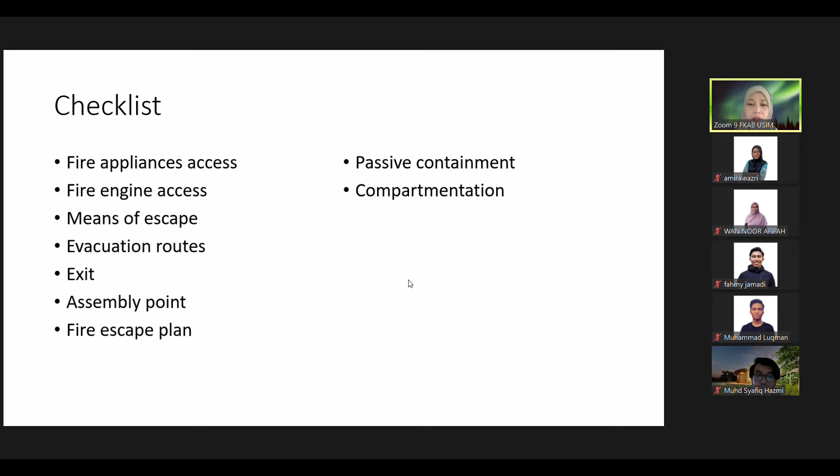Schedule 5, and what happened to your maximum travel distance, how you determine that, and evacuation routes, meaning that how is the circulation, how is the door swing, we need to identify that. Assembly point, the fire escape plan. Fire escape plan is actually how you do the route, the circulation for the fire, meaning that there is no obstruction.

Okay, how are you going to determine the fire hydrant? And I want to ask you whether this building has a wet riser system. Is there any elevator? Is there any lift? So this is not type of air. Okay, I think we are having slightly the typo, the checklist, the checklist.

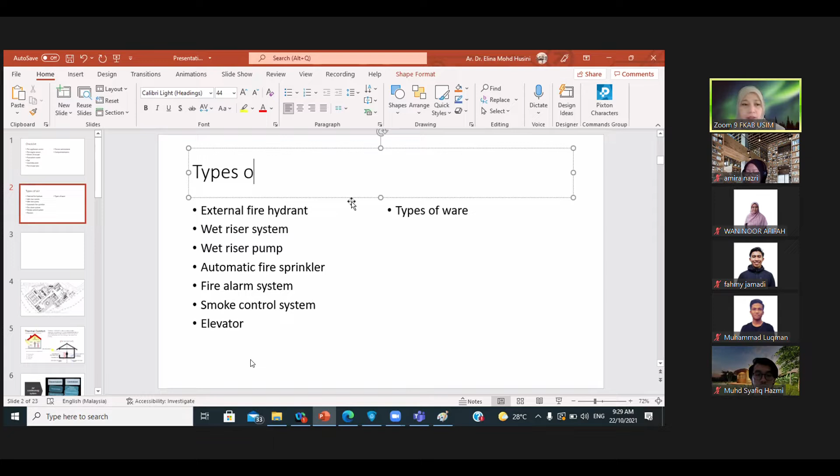And also we are going to ask you what kind of aircon. Okay, so be prepared, I think I would call here.

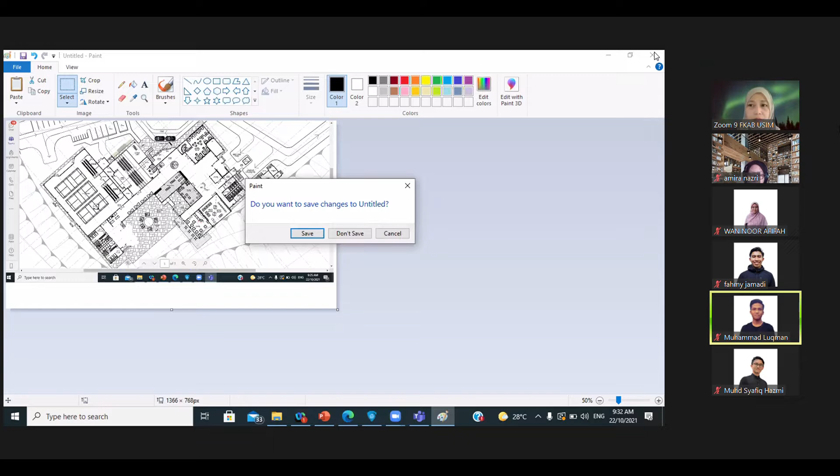It's okay, we are just sharing the knowledge here. Okay, is everybody seeing this? Not yet. Yes, yes, I made my picture smaller too. Okay.

So I'm saying that this is actually the plan. Can you just snap here? Or I'm calling one of you three, maybe start with Afifa first because she's dealing with the fire accessibility.

How are you going to calculate the fire accessibility? This area is about 4,000 meter square. I'm just giving you the information. The building itself is about 2,900 meters square. Most of the building here, the height is about 3.7 meters high.

Okay, and the information for width and length. Okay, width. So this is just roughly. Width from here to here. Okay, this will take about 50 meters, more or less.

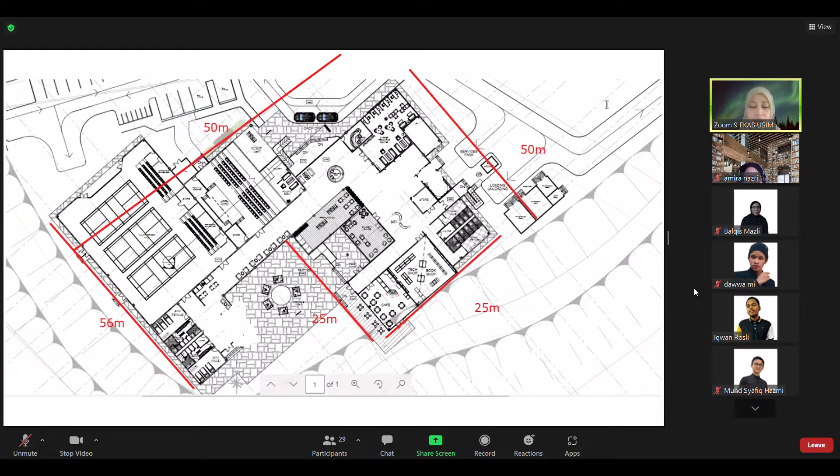How is your site analysis going? Is it going well? Site analysis for your current project, Iqwan? Iqwan, yes, now you are entering the final project? Yes madam. Site analysis already done? Yes, already submitted, already submitted.

So of course, how about the group for legal and also for services? They also done well. Okay, so they know how to search. Yes, the nearest point for water discharge, water connection. Okay.

Yes, okay, okay, what else? What else do you need to determine, Iqwan? Maybe the electrical, madam. What is it? Sources of, what's it called... electrical supply. Electrical supply, okay.

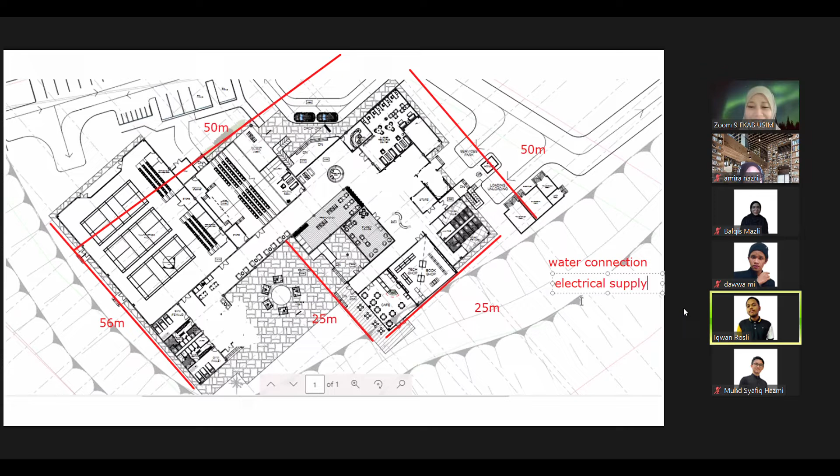Electrical supply, you need to search what is surrounding there. So what are there? What are those? You need to know what? To know electrical supply, you need to know the surrounding. You do the site analysis but don't know how to do the site analysis.

Who are the grouping inside your services? Who is it? Iqwan isn't in that group. Not, madam, but even if not, this is the project you are going to do individually. Of course you need to know this, Iqwan. Okay madam, if not, how?

Okay, who else? What else? More? Wastewater. What else?

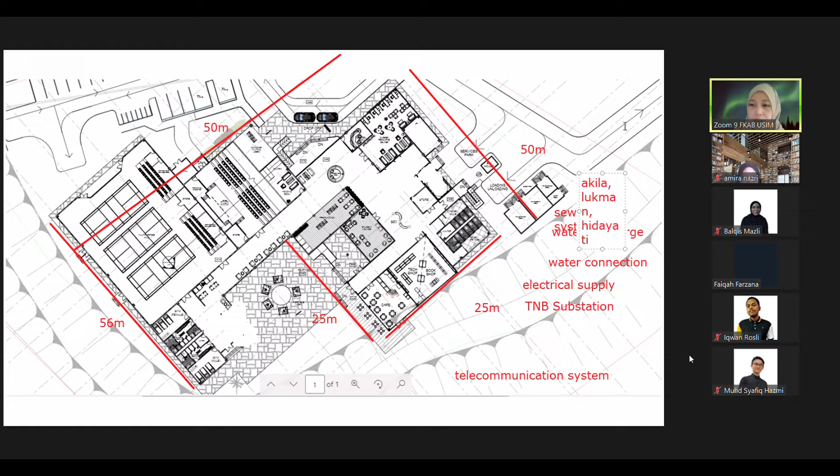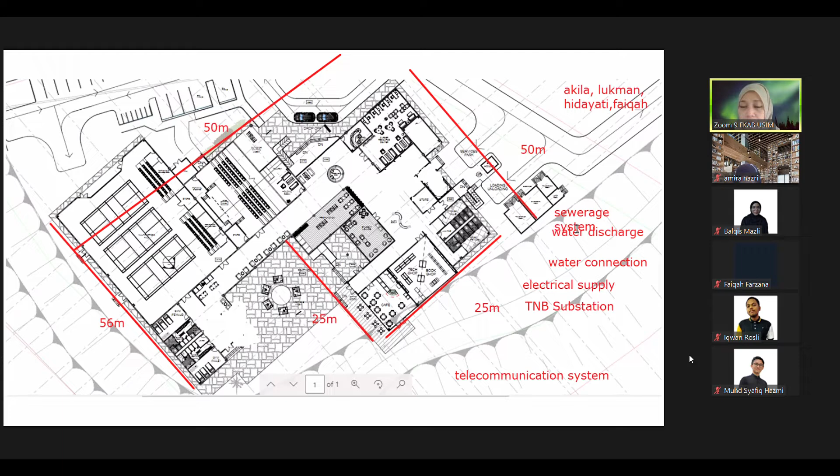So I must say that Akila, Luqman, Hidayati, Faiqah will advise us because you are really expert in this matter. You already have done some of the discussion and also in-depth study on the sewerage system, water discharge, water connection, electrical supply and fire appliances.

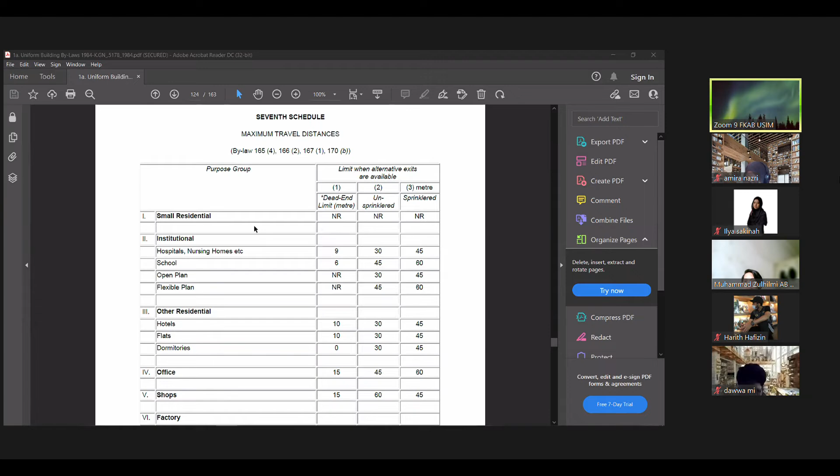Okay, please tell me what you can find from this. So this is the 7th schedule. So our type of building is the place of assembly, this one. So the minimum distance together is 45 meter, and the maximum elevation is 61 meter.

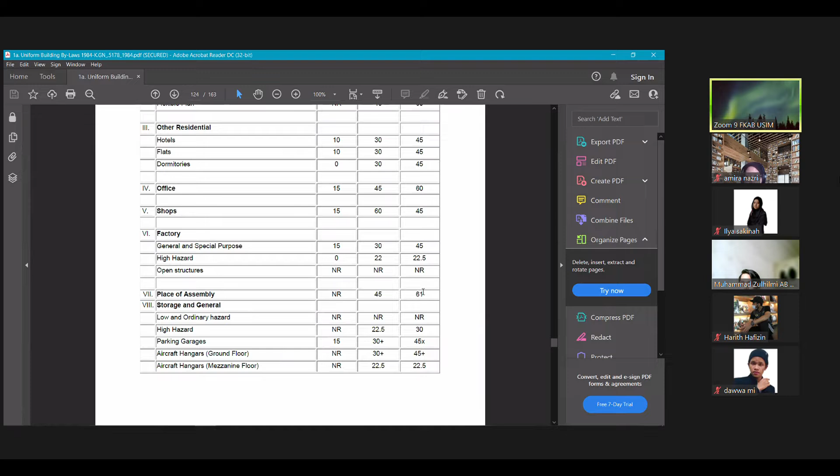Is it correct? No. You read back the title there. Read back the title. Sikit title there. Okay, the 7th schedule, the maximum travel distance. Okay, maximum travel distance.

So the first group is, nanti, place. Limit when alternative exits are available, I want you to read. Okay, limit when alternative exits are available. Maknanya unsprinkled system. The building is unsprinkled system, no sprinkler. So the maximum, this is maximum, not minimum. The maximum, it can be lesser than this one.

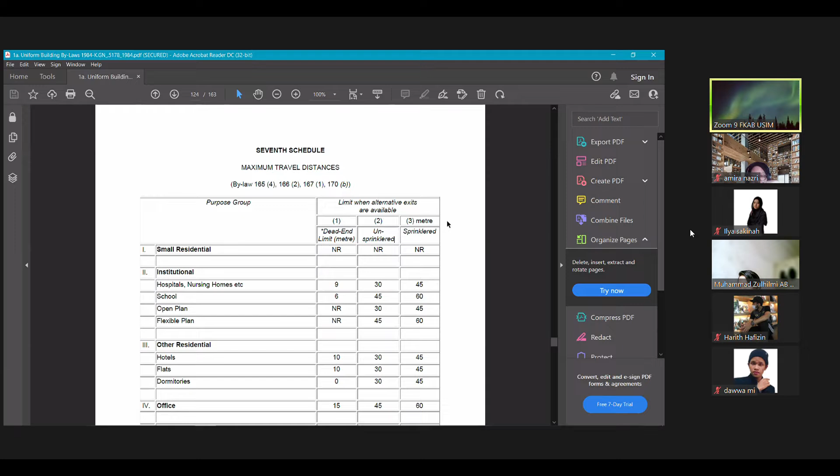This is the maximum travel distance, tengok tadi, nombor 7 tadi, part 7. Go down to part 7. This is the column for unsprinkled. Okay, 45 meters from door of the fire staircase to another door fire staircase. Maximum is 45 meters. It can be 30 meters, it can be 40 meters, but the maximum cannot exceed 45 meters. If 48 meters, you still need another staircase, or you have to change the design, so make it nearer, your fire staircase door to another fire staircase door.

So the third column, 61 meters, meaning, what is the meaning of 61 meters here, Zul? Okay, go back to, apa, okay, ada, kenapa ni? It is with column, the sprinkled. Yes, sprinkled.

Okay, Zul, do you know what sprinkler and non-sprinkler means? If there is no sprinkler...

What is the image for sprinkler? What is the location of the sprinkler? Ceiling. Okay, so you know.

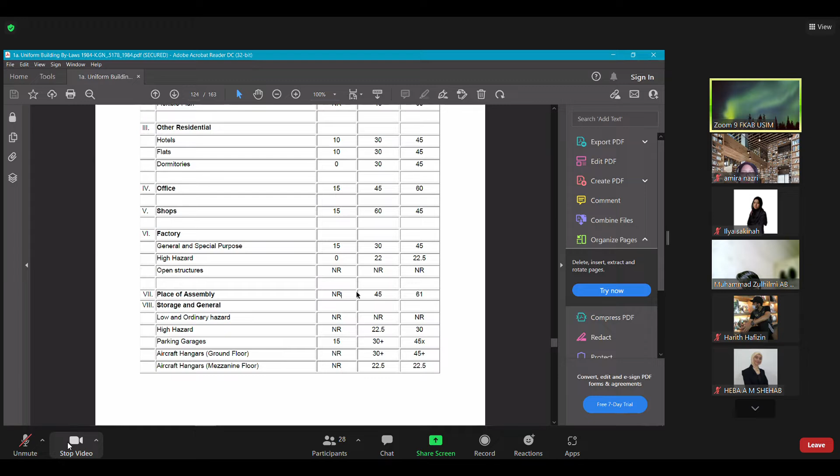Okay, so do you understand now, Zul? Okay, I understand now. Before this I didn't really understand.

Okay, I'm sharing screen again. So...

Zul, where do you want to determine the fire staircase here? Where do I determine the fire staircase? Around the service area.

Okay, you try to sketch. Go to annotate. There's a code you annotate up there. Okay, try to design anywhere. Put it somewhere first, then explain why. The building is already there, you just need to fill in. Anywhere, don't follow this existing design - it can be anywhere as long as you have the reason.

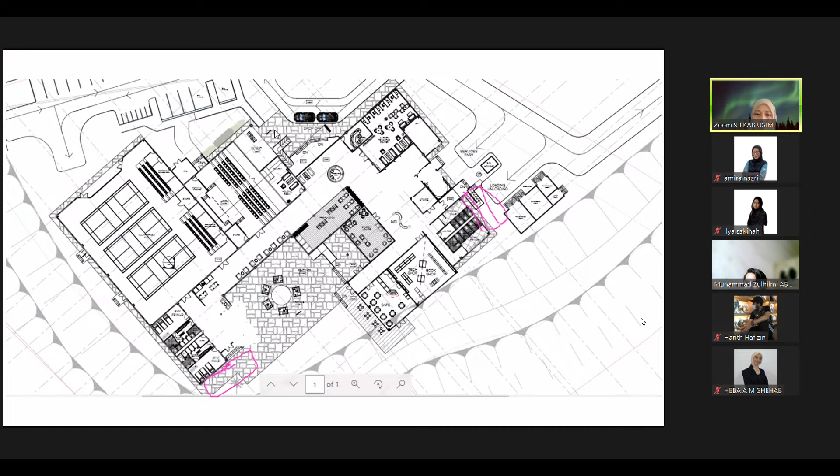with sprinkler - this building has a sprinkler in it. So what makes you determine the first staircase is here? This is your first staircase here, and your second staircase is here. What is the reason? Because since the building has the sprinkler, so the max travel distance is 61 meters.

Okay, so how do you calculate the 61 meters? From the door of the... No, no, it has to be perimeter zone. Perimeter - what is the perimeter? I'm just saying you need to calculate from here to here. Okay, back, wait, in the back here.

Can I just say that you calculate directly like this, 61 meters? Okay, how are you going to calculate? Can somebody help quickly? How do you calculate?

I cannot hear you because of the break. Okay Heba, how do you want to help Zul? It's actually determine the first staircase is here and the second staircase is here. What makes him decide to determine the fire staircase is here? How can he calculate that this is the maximum 61 meters? What is the procedure, how does he calculate?

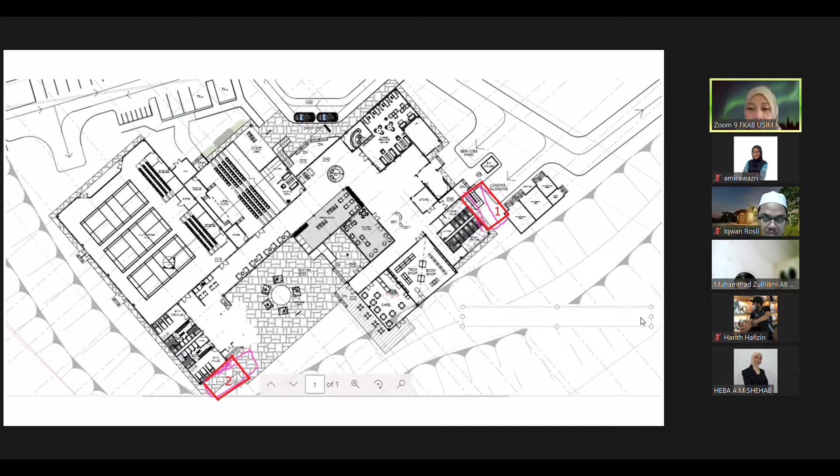Need to calculate the perimeter from the pathway, like the exits, until you reach the other staircase. Okay, then - not just answer a straight line, based on perimeter. Okay, perimeter meaning you calculate this - you cannot simply say like this, or just simply cross the building like this. You have to calculate based on perimeter.

The 61 is this one to go outside. But let's say you have to measure from here to here to here and coming back to here - is it 61 meters? If this is exceeding, you have to change the location of staircase number 2 or staircase number 1 so that the distance from staircase 1 to staircase 2 along the perimeter is 61 meters.

Now do you understand, Zul? Faham tak? Yes, I get it. If this is actually more than, let's say when I calculate - okay this is about 20, just now it's 25 meters. 25 meters, let's say this is already 25 meters.

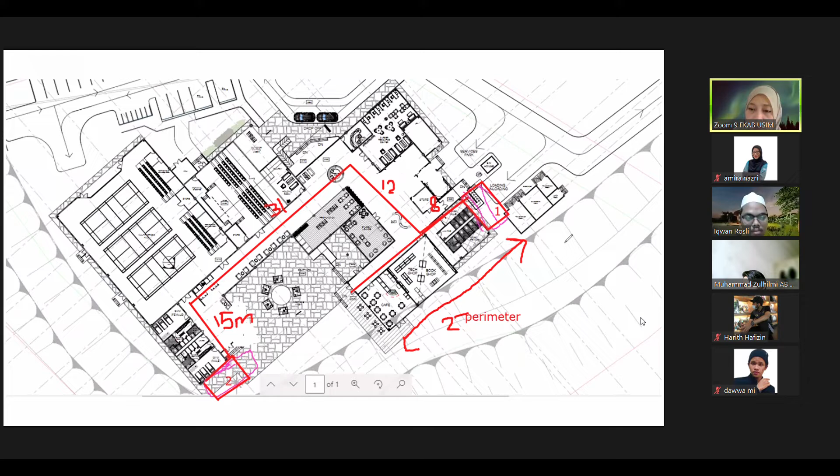It's about 51. You calculate, is it more than 61? 15 add 31 add 12 add 8. Berapa dia punya perimeter? Total? 66. 66. So meaning that

This is already exceed, betul tak? Exceed the fire staircase location. So you need to redesign back to make it nearer, Zul. So mana Zul? Exceed. So you cannot put it here, you need to find another location. You adjust the location, need to make it nearer.

Maybe your staircase shall be here. Oh, jap. Your staircase mungkin dekat sini. Staircase number 1 or number 2, it shall be nearer. You kena dekat sikit. Any suggestions? Nak dekatkan could be, sikit. Yes, maybe could be here.

Okay, but you need to remember this is a public area. See, people got kiosk here. You don't simply put your fire staircase as an obstruction for people to move to the other place. Okay, so let's say you have to design the place, maybe here Zul. Okay, maybe here. This is the fire staircase.

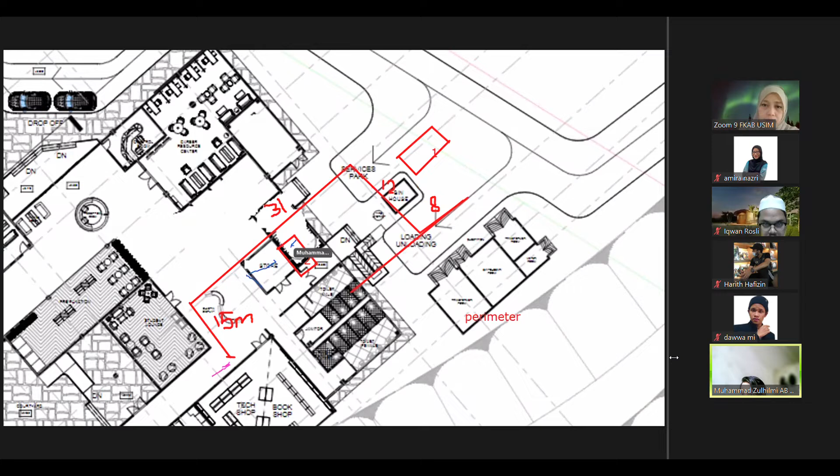This is ground floor plan. This is ground floor plan. Heba wants to help Zul. Zul, this is ground floor plan. If this is ground floor plan, okay. Let's say this is the fire staircase.

Okay, apa Heba? How you want to determine the fire door, the swing of the fire door? You know what is swing of the fire door? This is the swing. This is the fire door. This is the frame of the fire door. So this is the swing. How is the swing of the fire door? No idea, Heba?

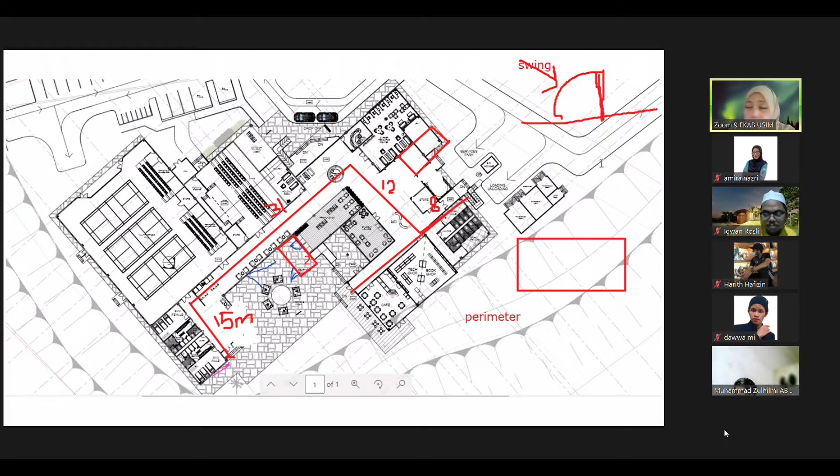Heba? Heba? Okay, this is not good when I'm calling you. If you cannot hear or your handphone has a problem, you have to text me. You have a problem? I'm checking my WhatsApp. No problem, everybody has no problem.

Everybody can hear me. Okay, Zul, macam ni. Kalau misalnya at ground floor level, dia punya pintu dekat sini kena keluar, Zul. Keluar. Okay, pintu yang kat sini kena keluar. Macam tu. Okay, ground floor plan. This is ground floor plan. Ni yang madam takut because madam dah ajar lama dah ni. Alright, Luqman. Clear Zul? Clear Zul. Okay, Madam.

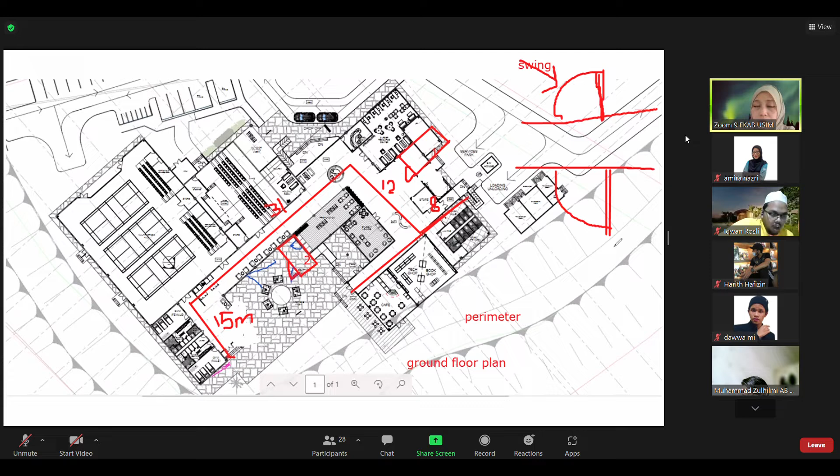Alright, so Zul kena tengok kalau if upper floor, the fire staircase, the door of the fire staircase akan jadi dari dalam macam ni. Dari dalam, ke dalam. So ground floor dia daripada sini dia keluar. Kalau daripada upper floor, so dia punya fire door kena macam ni, ke dalam. Okay. Second floor to this one, if this is a staircase, there is a radius.

Your swing of the fire door cannot be like this. This is not good, wrong. The fire door shall be out from the radius. You need to understand what is the landing of the fire staircase. You cannot exceed the radius. This is R, radius. So the swing of the fire door cannot enter the radius area.

Dia kena keluar, Zul. Jangan buat, do not do the fire staircase like this. You are encroaching the radius. Cannot. No, this is right.

Heba, are you understand? How do you do the fire staircase? This is for upper floor. But for ground floor plan, Harith, the ground floor plan dia kena macam ni, okay? Pintunya keluar. Okay, faham ya?

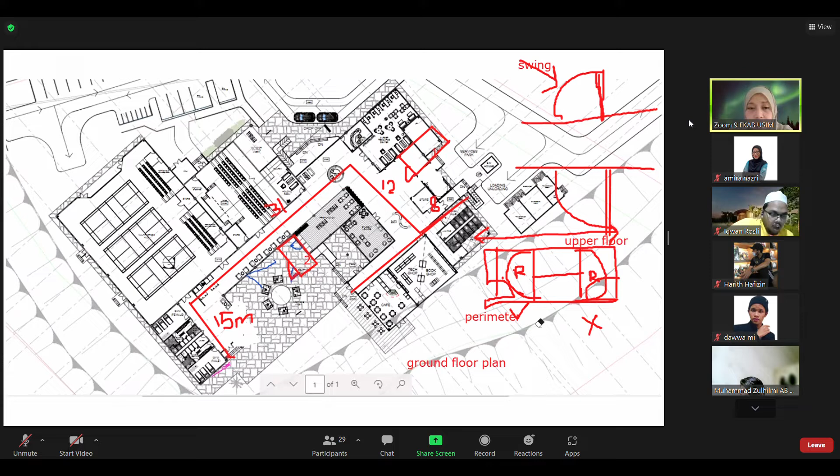Last week when I asked you, you said everything fine, madam. I am asking you, so faham ya? Faham ya cara nak buat pintu staircase?

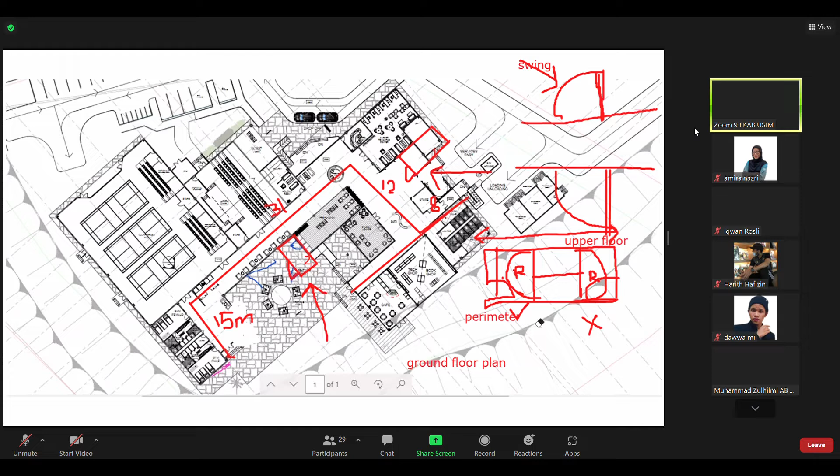Saya rasa centralized aircon system itu. Okay, centralize which area? You ni annotate, cepat annotate. Color sikit. Which area you want to centralize? You to use centralized aircon. Nampak ke madam? Yang warna kuning tu. Alright, okay, why?

Pasal satu lagi dekat yang sini. That area, is there any split unit that you want to use? Tak ada. Macam mana madam? Sekali lagi kurang jelas tadi. You are proposing only centralized aircon. How about this area? How about this area? This area?

This area? This one is centralized. Okay. Yang the blue one, what do you want to use? Yang sini split air conditioning system aja.

Okay, split. If you are using centralized aircon, what do you need to have to provide the space for mechanical? What you need to have?

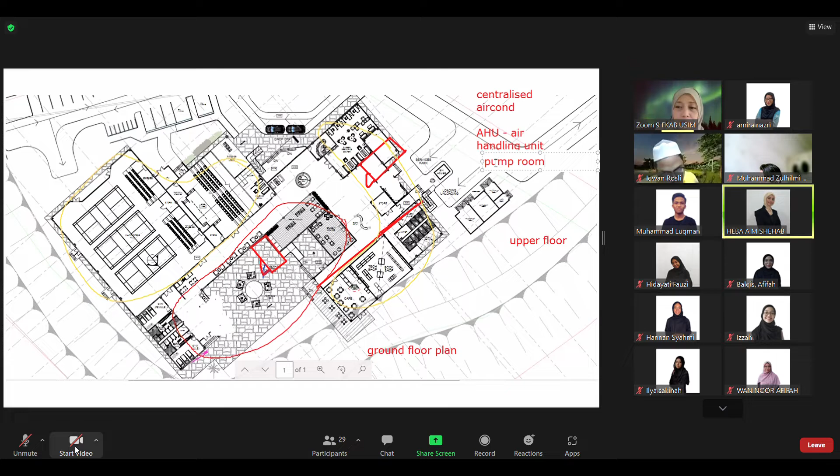You need to have pump room. If not, the system cannot generate. Yeah, you need to have pump room. Inside pump room, there is a chiller to cool. You need to know the system, how the centralized aircon being function.

Madam, pump room dengan mechanical room tu sama ke? Yes, some of us we just put, okay, because you are at the second year, mechanical room, but you need to specify pump room. Mechanical is the system inside there. I will show you the photo, the image. Okay, so kalau nak decide centralized aircon, you need to have AHU, you need to have pump room. Okay, now understand so far, okay?

So for this plan, the AHU, I think they put somewhere. Yeah, I think they put somewhere here. Wait, AHU warna apa? Warna kuning. They put somewhere here. This is the AHU. Because the AHU, the ducting, they will go like this.

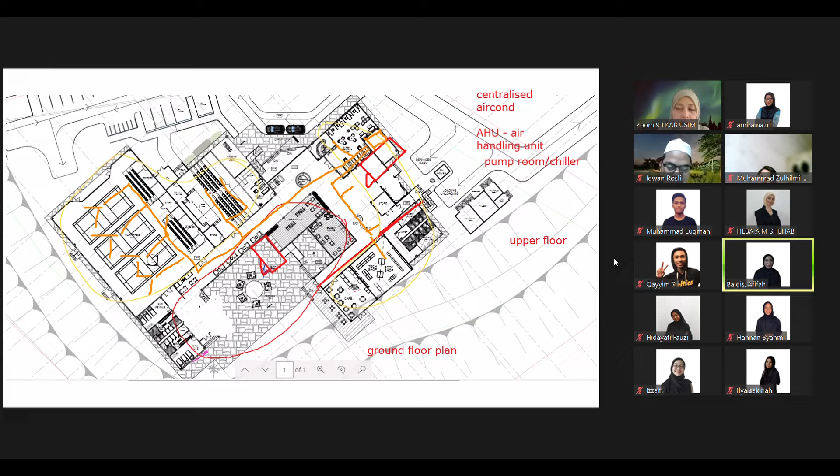Afifah, you want to share something about the bomba (fire department) calculation? You already calculated the volume, right? So your sketch, is it enough? Estimated 9,805, meaning it's more. Note that down there, 9,000 something. In here you can annotate, pick annotate.

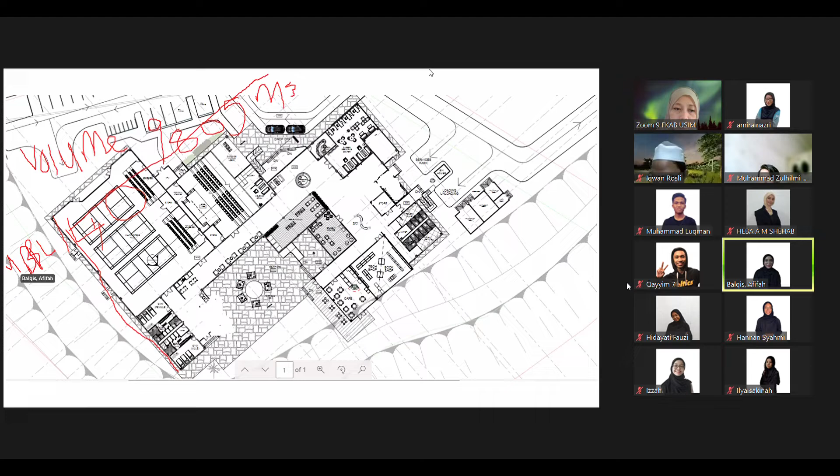Volume. The volume is... nine, sorry, zero, five. Okay, so according to bylaw 140, what is the decision? The decision is we use 1/6, okay, of the perimeter, 1/6 of the perimeter.

So meaning if 1/6, I haven't checked the chart. Can you share with me what is the chart? Chart, yes. Oh, is that okay, let me stop sharing. You share the volume equivalent quarter, half, yes. Lots of Korean, lots of Korean pictures there. Madam, can you see this? Yes.

This, okay, 1/6 of the perimeter for fire engine access, okay. You stop there, you stop there. So I want everybody to understand, Afifah already calculated the volume. Length times width times height. What is the volume? Width times length times height, you get the volume.

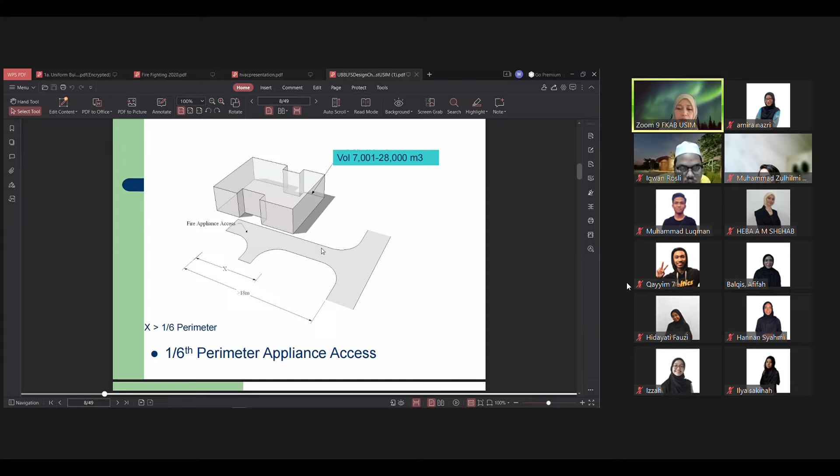All right, okay, everybody understand? After I test one by one, then I know some of you still don't understand how you want to get that. Because later you won't be able to do the design.

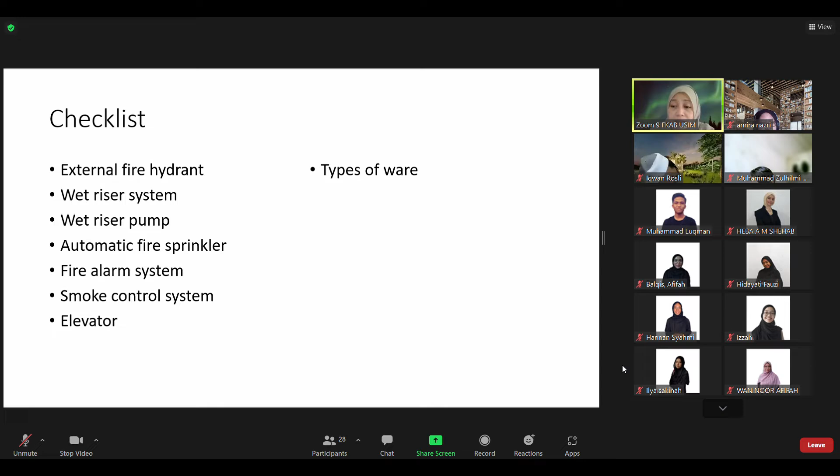Okay, please revise back the wet riser system, dry riser system, why you need to choose wet or dry. Elevator, how to do it? Do you need an elevator, do you need a lift? How do you draw the lift? Next week I will ask people to draw a lift too. Okay, settled.

And continue with our lecture on thermal comfort. So we need to understand how the system, air conditioning system, works, because we need to understand the physics about thermal comfort. Thermal comfort is the outcome of a well-balanced combination of building systems adapted to both the location of the building as well as the type of activity performed. Okay, let's say the activity inside the studio.

We have a lot of movement, people measuring, people getting from one place to another to discuss. So maybe you need the arrangement and the measured reading for the aircon slightly different. You have to control the system. Let's say 24, you are using now 22 degrees, for you it's quite cold, and also the load occupancy, how many people inside the room, quite many of you. Let's say for first year, already 50 of them inside one studio, so we need more, lots of aircon.

So this is actually to understand the keywords here, if you are using thermal comfort, and why you need the aircon system. What is evaporation? What is heat gain? Sorry, not heat gain, okay wait, let me correct, heat gain, heat loss, and radiation.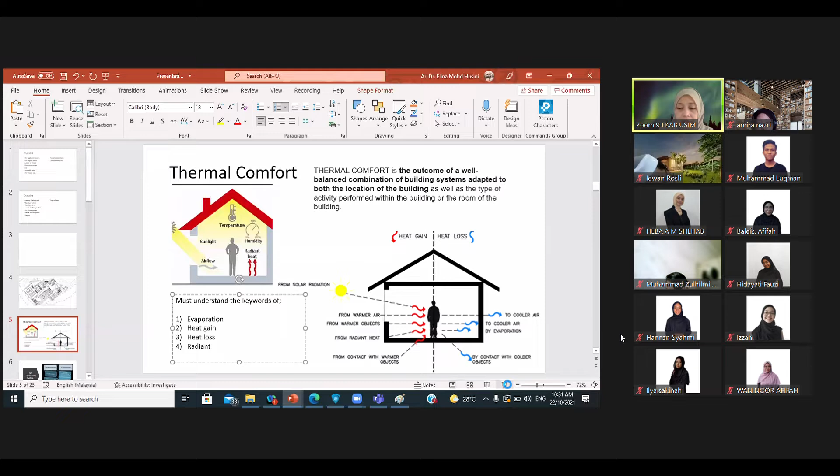You need to get the definition. During the exam I will ask this, what is evaporation? Yeah, what is heat gain? What is heat loss? Please sketch the radiance.

So bear in mind, in my class, oh no, now it's 28, just now it was 30, so one of the students is not here. So I'm afraid that those who are not consistently inside my lecture, they cannot answer the question. My questions, a lot of it would be sketching and also drawing with description. I'm afraid that you cannot draw. Okay, you have to understand what thermal comfort is.

Okay, so air conditioning systems, there are two: centralized and decentralized. For decentralized, we use the split unit system, meaning it is controlled by its own compressor. Compared to centralized, there are terminal elements because they must gather the sources and the mechanical equipment at one area, the cooling area or pump room, to distribute the system. Then you need ducting. If decentralized, single package split unit, you don't need ducting.

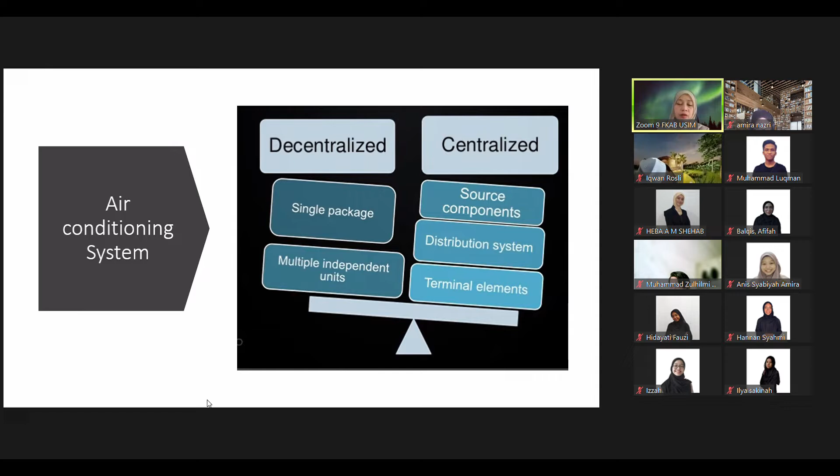I will ask students. So you need to know which air conditioning system to provide for the building - centralized or decentralized? If you choose centralized, you need to provide an AHU room. You need to allocate the area, provide in the ground floor plan space for AHU, air handling units. And also you need to have the pump room. Without the pump, how will the chiller cool? The system needs it to operate and cool the area.

Okay, decentralized I mean normally in mid-rise buildings, because this is only a small area. That is why office buildings for bosses sometimes use the split unit, because not every day, not everybody has activity inside the room. Most of the time, for open area offices, they use centralized because everybody works on time from 8 to 5, so the position, the location, the seating would be at the same area, the same place.

Normally for high-rise buildings, with consistent usage time, that is why we use centralized - meaning 8 to 5, 8 to 5. If the space is not consistently being used, let's say it's only used maybe today 11 to 12, tomorrow 3 to 4 o'clock, then they may use a split unit system or package system.

Okay, I will ask what's the difference between centralized and decentralized. Don't understand? You need to ask now. What is the advantage and disadvantage?

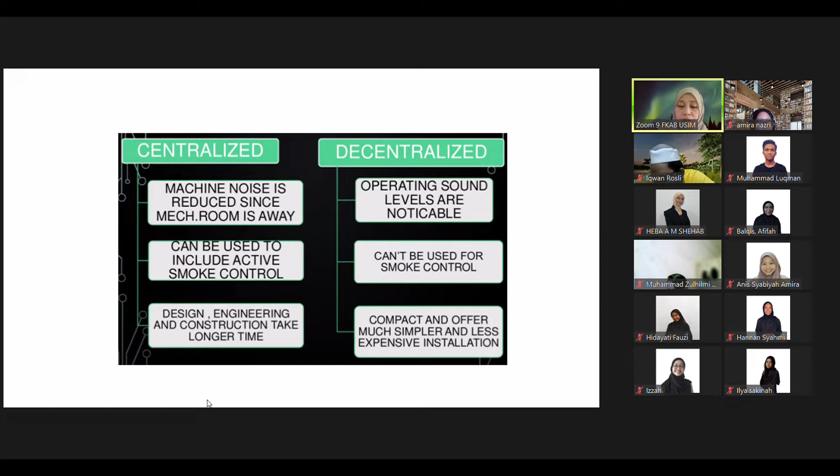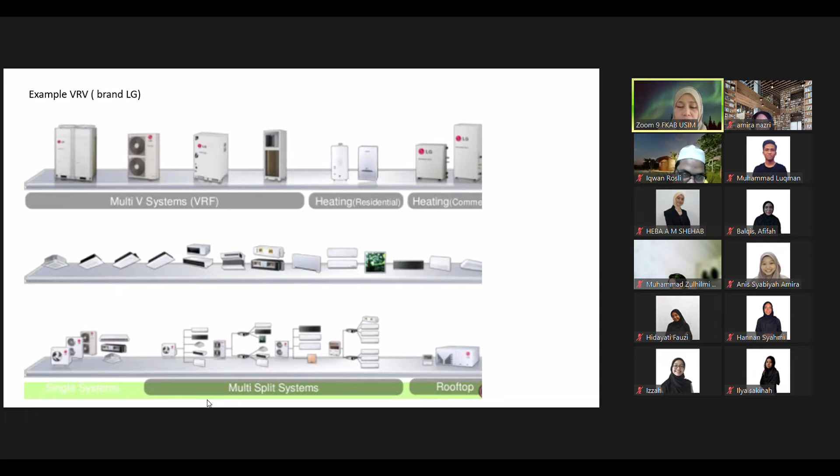Okay, what is a chiller? The chiller is in the pump room, sometimes at the cooling tower on top. We call it a tower because the location is on top of the building, the rooftop of the building. So the chiller is actually to provide a comprehensive air condition solution.

Okay, this is the brand, one example brand is LG. This is how I want to tell you that a chiller is a large system, very heavy. You need a damper so it's not so noisy. You need another layering on top and at the bottom so this will not disrupt the noise to other spaces. So the chiller system is very heavy and big.

That's the machine. The AHU, air handling unit, is slightly smaller - you just need about 2 meters by 1.5 meters of room, width and length, for the AHU on every floor. And the control system is just a control, like yours, to control the aircon - and that equipment is very small.

And for the building management system, you need a building controller, an officer to control it. How is centralized operated from 8 to 5? What if after 5 they have another function? So the building operator needs to adjust - on that particular day, they can adjust and use the aircon up to whatever hour is needed.

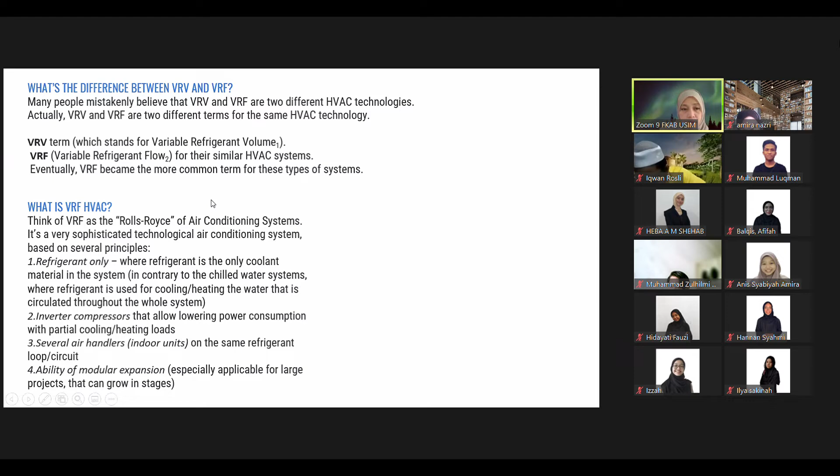Very small, okay. If you are using VRF, they still need the indoor unit, they still need the ducting as well. They do need ducting. Yeah, you still need ducting, but inside the VRV there is a fan coil. If it's centralized it's very huge. Just now you need a chiller, okay, a big chiller. Okay, but the AHU is also big because they want to distribute the ducting and everything.

VRV, if you use it, you still need ducting and diffuser. But your air handling unit will just be small because inside there is only a fan coil there. Like earlier, it's only a fan coil. What else? Just the fan coil. You don't need a big machine inside.

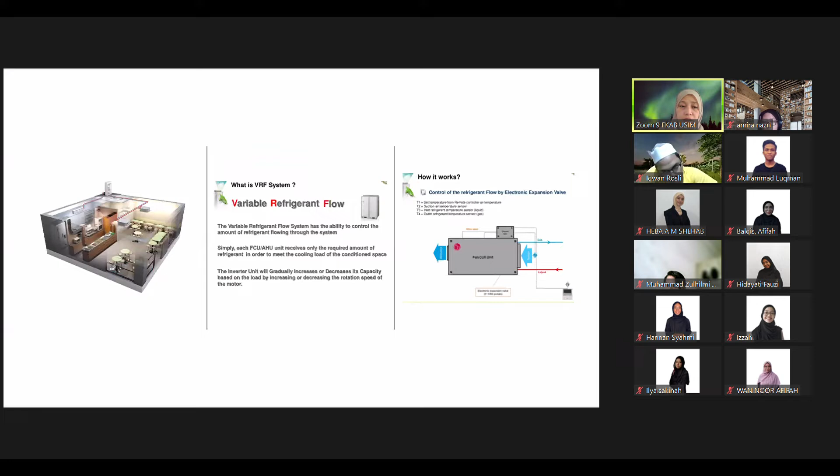The heat recovering system is very small. The system is small. Okay, let's come back again.

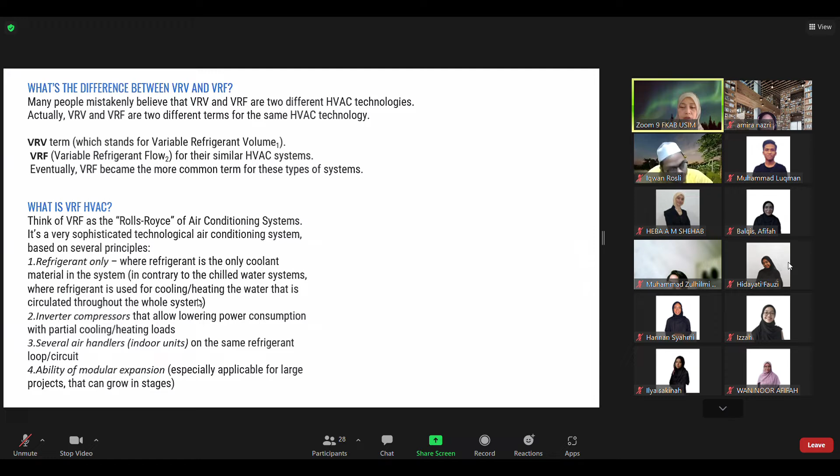But if you are using the VRV system, you can alternate. First floor and second floor, they share one AHU. Third floor and fourth floor, they use another AHU. Maybe the AHU is only at the third floor, and from the third floor they blow out. Okay, they run it through the ceiling, from the wall and through the ceiling upper, and they distribute it with the ducting.

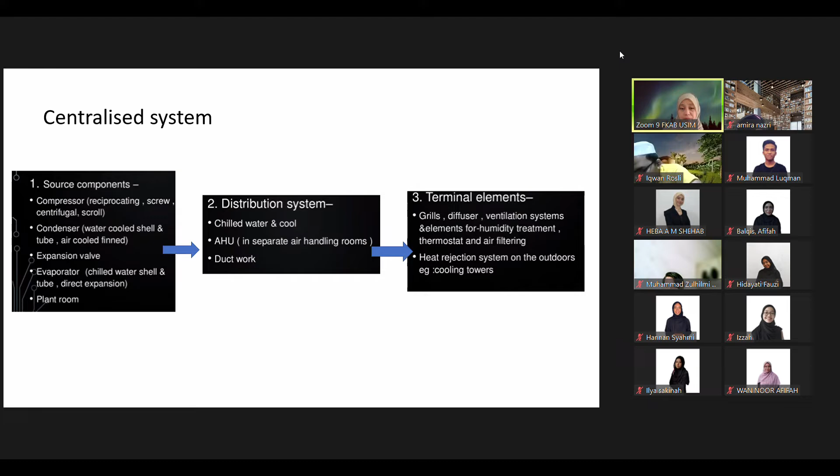Another thing, after you do centralized, if you pick split unit system, sometimes in the boss's room, a room that not everyday people occupy, maybe the people can control it. It's better for them to use indoor unit system. It's a split, meaning separated from centralized, because we need to maintain and health comfort level, distribute air condition to the occupied space.

Okay, has it been a while? Another one, the package air conditioning system, package unit, is also normally a bigger version slightly compared to split unit. The conditioned air is transferred to the space to be conditioned through ducting, which is usually hidden in the ceiling and wall of the building.

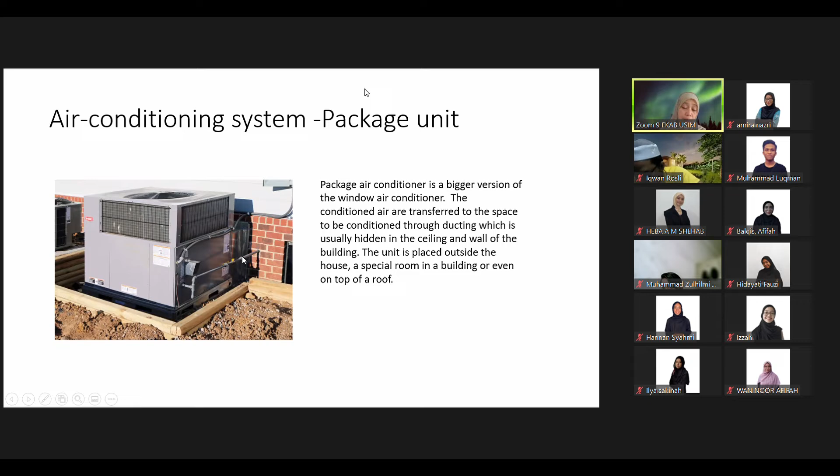The unit is placed outside the house, a special room in a building, or even on top of the roof. But in Malaysia, not everybody uses the package unit. That is a system, it's big, it looks like this. But it's really controlled, if the occupancy is like 100, you cannot use this one. Above 50 cannot. If there's only like 10, 12 or 20, then maybe you can use package conditioners.

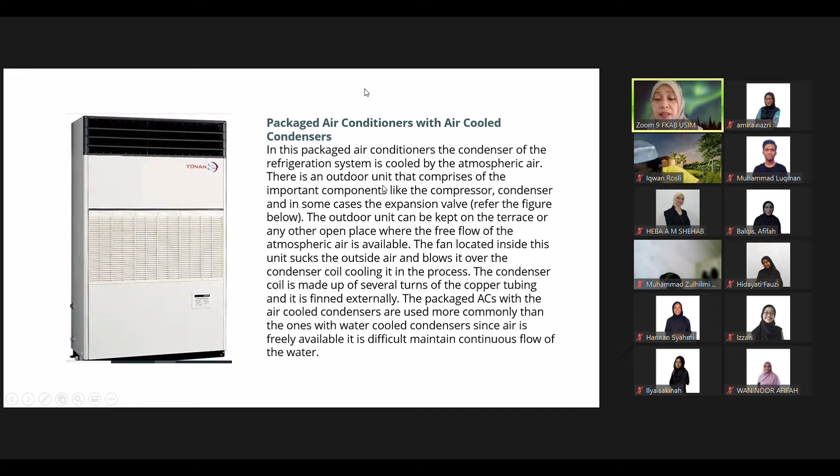But if exceeding this, I think it's better for you to use centralized. This is more or less how it goes, there is a blower in the package central unit, there is their own compressor, their own blower, and they put it outside at ground package system, then they can distribute the air cooling system for one house, whole house you can use package system, no need to use centralized for the whole house. But there is also split units, meaning maybe master bedroom, maybe the active room where they want to do activities, they use the split unit system because they have odd hours, not consistently used by the occupant.

Okay, so far that's the end of the aircon topic. Any question? Any question?

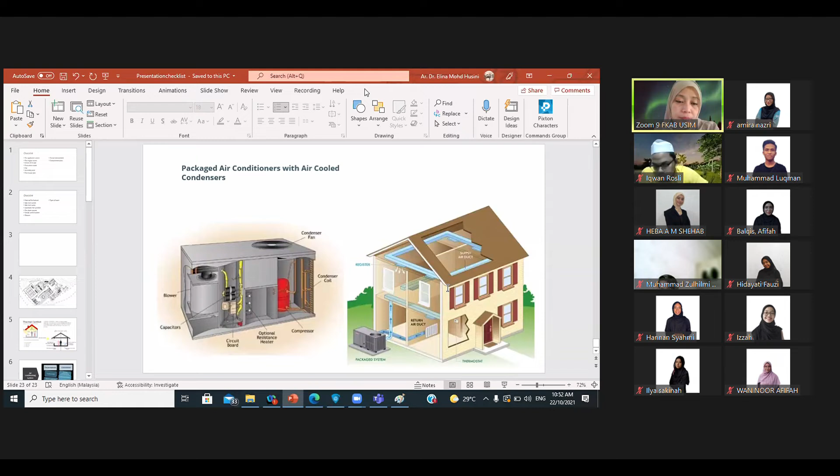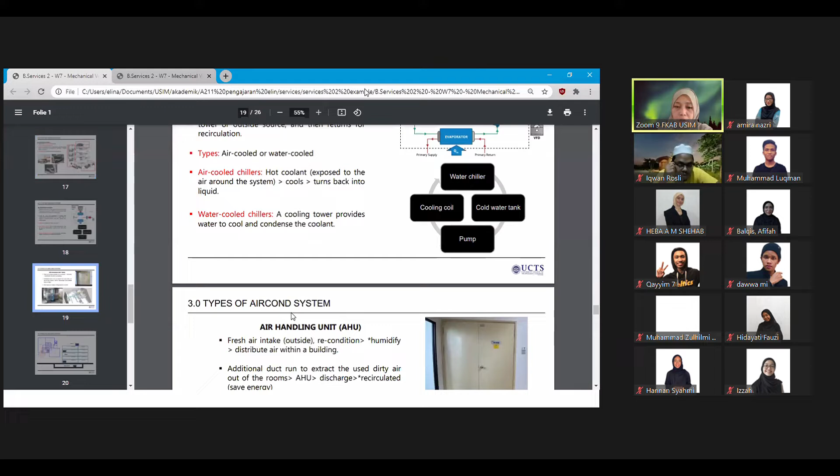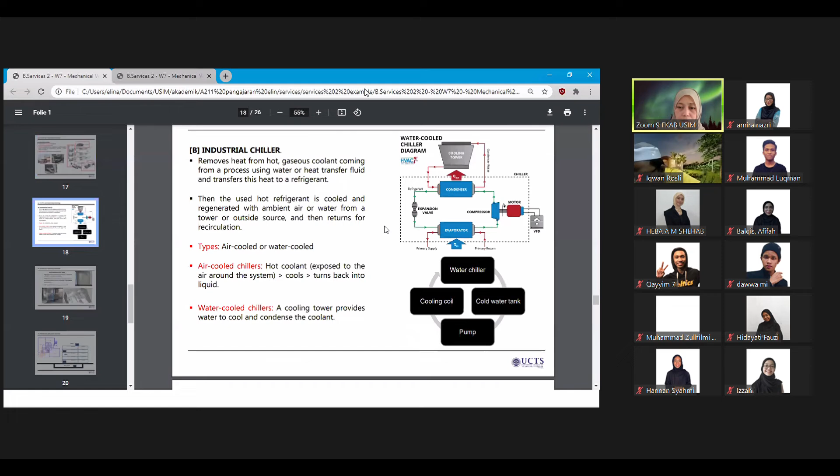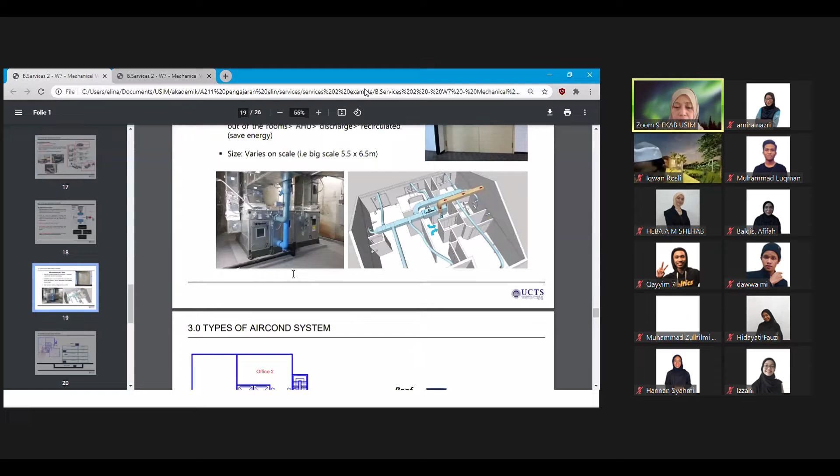What was that? Air handling unit. In the air handling unit, it will process the fresh air intake from outside the system. From the cooling tower, there's a chiller plant that chills the air. But to distribute to every floor, they must have an AHU to control outside air and humidity, depending on the scale of the system. That's why from the roof to distribute to all floors, they must have an AHU. There's also a filter there.

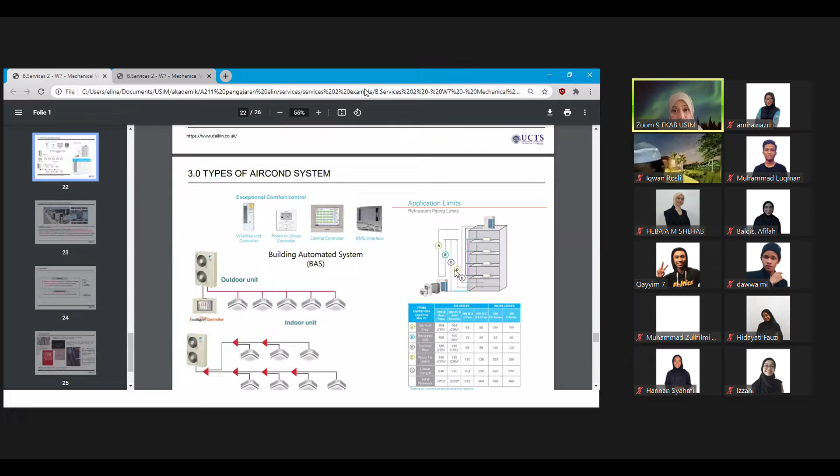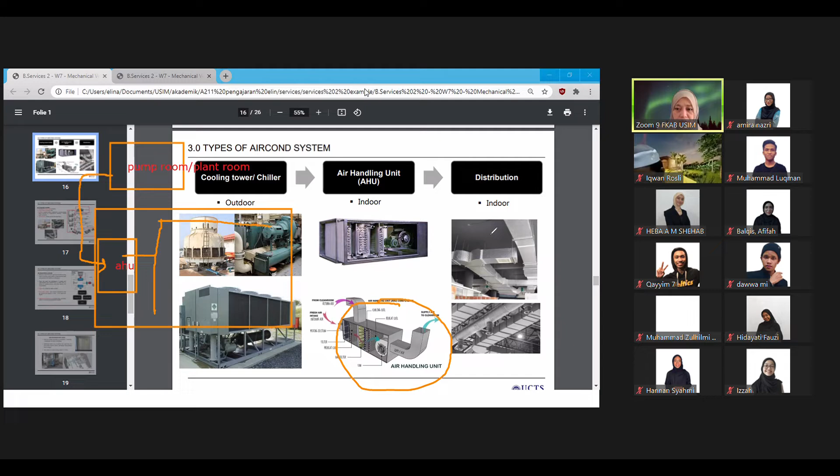Okay, from the pump room there's piping to the AHU. From the AHU, this is the air handling unit. So there will be distribution, that's why there will be the ducting. This is the diagram, this is the ducting. Ducting is like this.

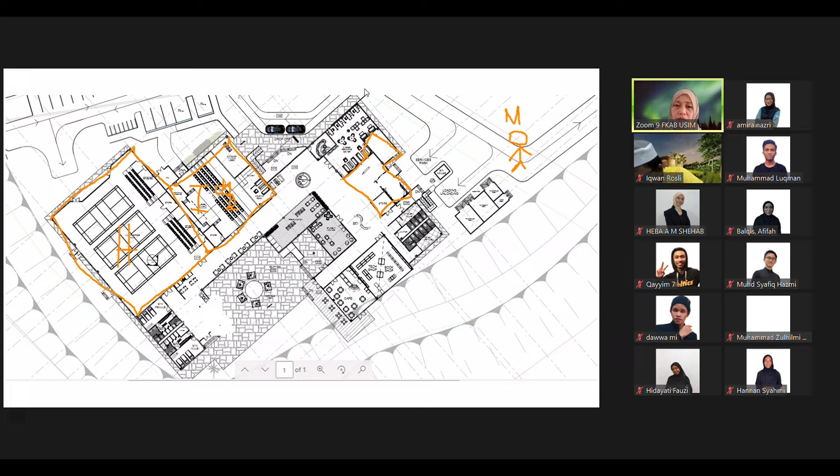Let's say if there is a fire here, they will together be situated side by side by the staircase. There would be a pump room, there would be an AHU, there would be a toilet area, all the services, electrical room meaning that there would be a control electrical.

Control room is different, you can put it at the front area, slightly at the welcoming area on the side, because they want to control the opening there, and also they want to do the security system, they must have it there. But the AHU you can put together with the services area, lift.

So normally when you design a building, you have to see where is the location to put this one, as long as this can be near the services road. See at the back is the services area, services park, because there is a bin, there is a store. This is the AHU, and remember you need to provide the swing of the door outward, and they must have a ramp for the TNB substation for services, ramp down, and the opening of the door has to be outward, cannot be inward.

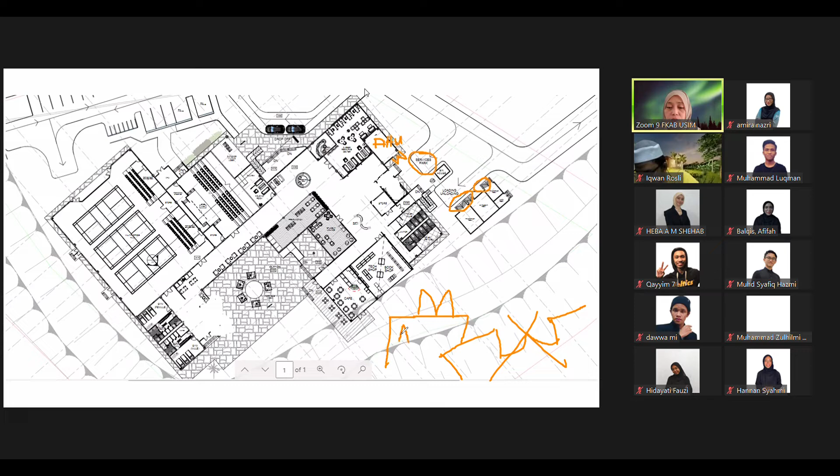If this is going to be a substation, so it cannot be wrong. So this is the AHU. If you position it at the end of the building, you can provide the outward door to people. If you want to do maintenance using this road, services park, you park somewhere here, then you go to the AHU and do the services.

Do you understand this one? Heba, you okay? Yes, madam, understand. Thank you. Okay, where to put?

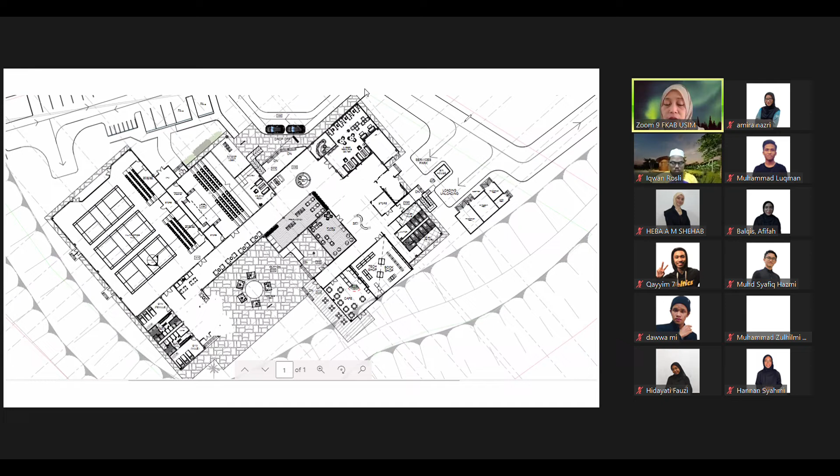Any other question? Next week we just finish off the building automation system plus the calculation. We still need to do the calculation on the loading occupancy, again mathematics next week. Today we just settle the air conditioning system.

Madam, for the advantages of this system is the smoke detecting. So how does the aircon system have to do with the sprinkler, with detecting, with the function of the sprinkler? Meaning what? Meaning when you need the sprinkler, no, sprinkler no, and non-sprinkler area.

One of the advantages of centralized is that it detects the smoke. The sprinkler works. So how does that relate to the aircon? What does it have to do with the smoke detecting? Does it prevent smoke detection? Okay, I understand the question now.

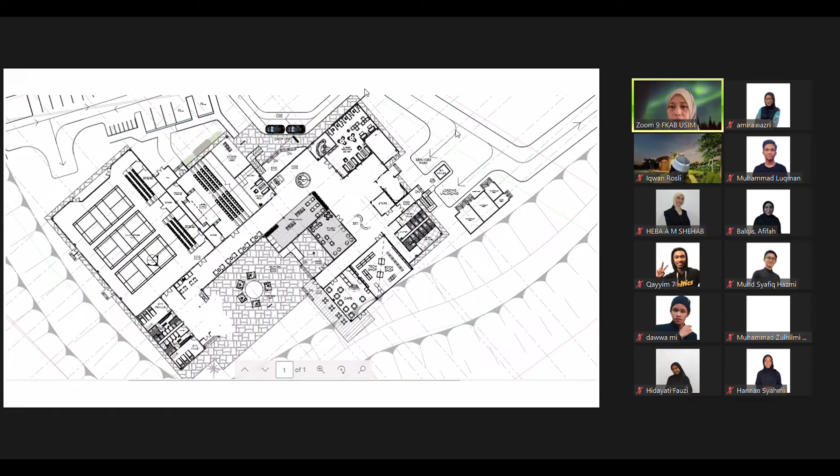Okay, I'll stop sharing this one. Let me try to find another one.

This has something to do with the condensate from your air conditioning system, because it's a very huge distribution, and inside the very huge system there would be warm air and humidity in the condensation unit. So in that kind of air handling unit, centralized, there would be a system that can work together because of the humidity, because of the condensation happening. So they will take into account how this system can relate to sprinklered and non-sprinklered areas for fire.

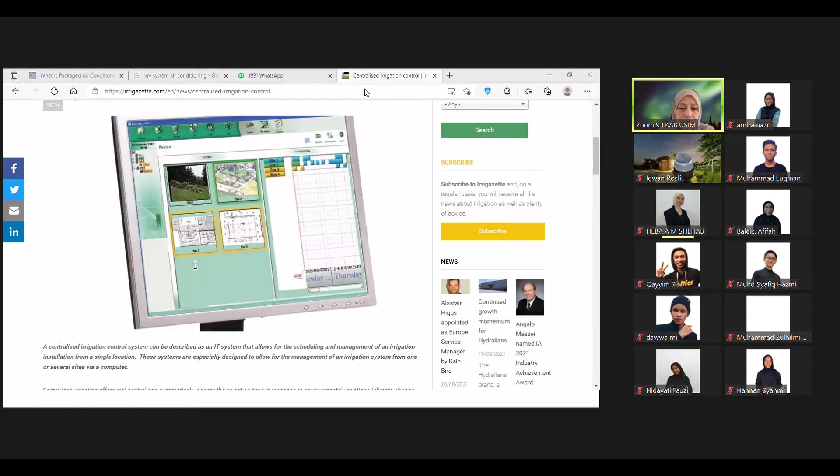But when it's a huge volume, a big area scattered for centralized systems, there is of course a system to cater to the sprinkler as well. The piping will go along the way with the ducting - ducting this side, piping this side. But they can go along the way if the mechanical engineer designs the piping so they are not crossing each other. So the component of the centralized control system runs along the ducting, but they are not sharing the same ducting.

The sprinkler only uses piping because inside the piping there is water. Inside the ducting is the air, the fresh air that comes from the inlet AHU. They are two different things. But they can get the benefit of how they design the piping and the ducting in terms of the space area - they can hang off each other. Under the ducting, they can hang a hook for the sprinkler piping.

I'll show the image there. Wait, I try to get the image. Centralized system. See, where is the image? Office.

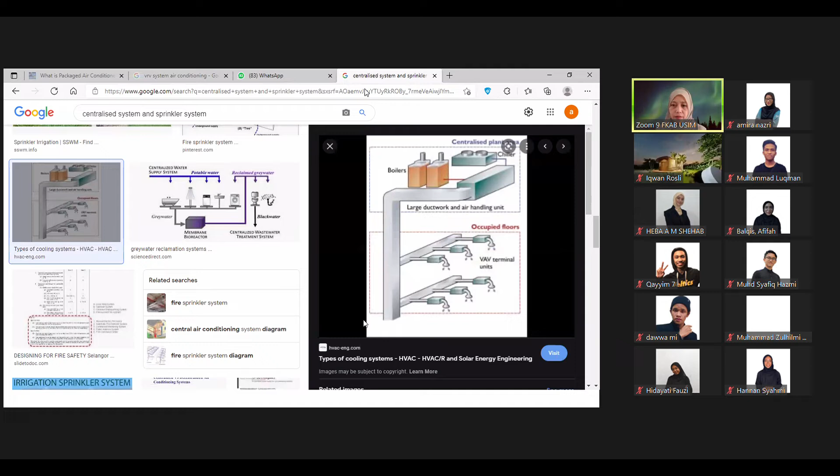Okay, the line here, the riser line. See, the sprinkler head is just like the ducting, but they can run the piping underneath the ducting area. Let me try to find the ducting aircond image.

Can you see, in terms of design? The air conditioner pipe and also the wiring - they can be designed along the way, but they are not sharing the same place. Different. This is for air, the piping is for water. There is sprinkler water inside the piping.

It's like this - it's not the same, but because they are in a very huge area, it's an advantage for them to design together. Sometimes they hang the piping together.

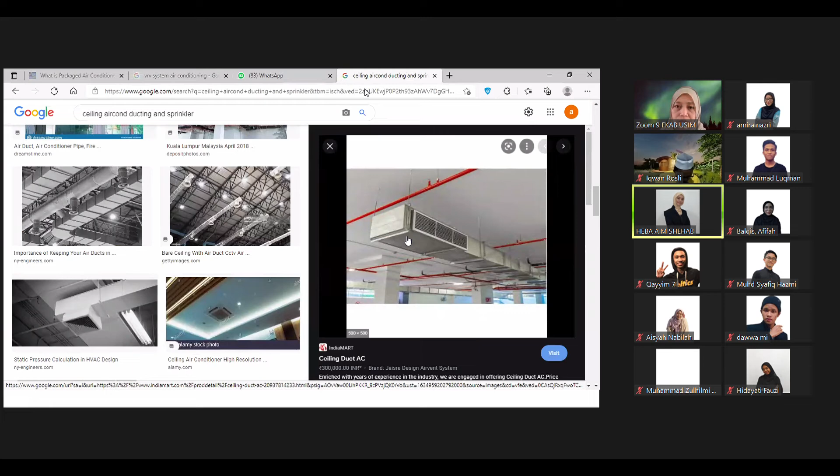Can you see the rod wire? Steel rod here to hang it. There are several types of ceiling - suspended and non-suspended. This one is a plaster ceiling. There are two types, suspended and non-suspended. Suspended meaning you need an aluminium frame to hold the ceiling. Okay, I'll put it here. Wait, let me get the picture.

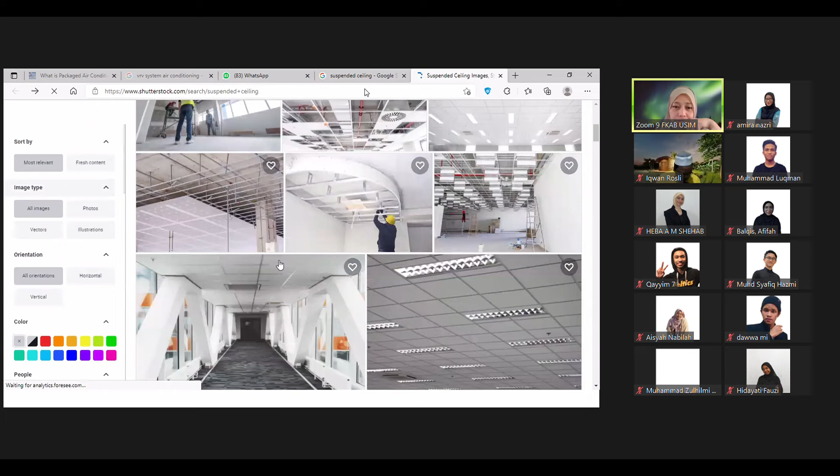Sometimes this opens for maintenance. For maintenance, one side dia akan open. We will open it. This is for decoration, very minimum cost for decoration at the ceiling area. Santai, okay.

Now you know how they will fix the fluorescent here, the ceiling, the diffuser. Ni diffuser tau. Okay, and this is the rod. This is the beam. Ceiling dia kat bawah.

That is why I need everybody to sketch the height of the ceiling, the beam, where is the area for air ducting, so you know the air ducting is above the ceiling area. Nampak? This is the one. Can you see this one? Ducting dia? Under the beam, you cannot pass by, you cannot punch the beam, you cannot do holes at the beam.

Beam ni is a structure. Tak boleh langgar, tak boleh potong beam ni. Haris, tahu tak Haris? Nampak Haris? Haris.

Alamak, nanti nak buat section tak tahu dah kalau tak masuk kelas. Okay, so this is the one. Nanti next week I akan soal Haris.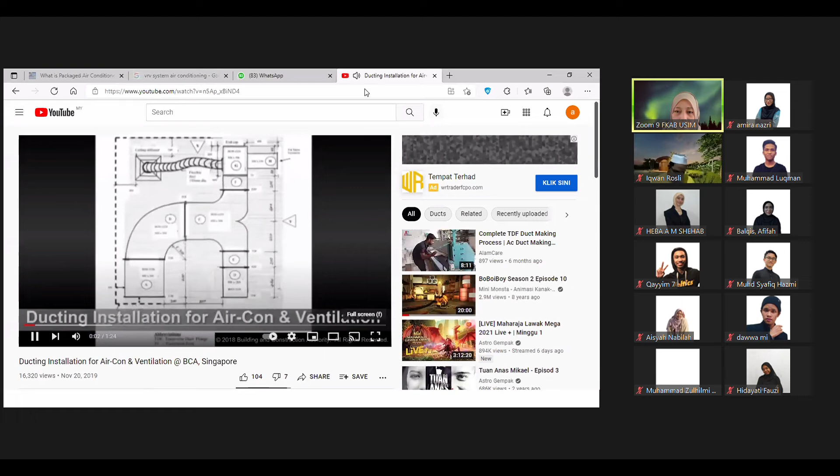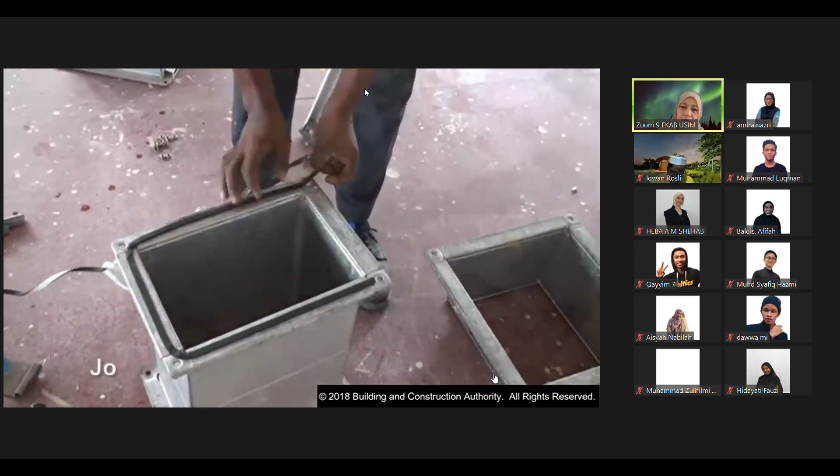This is the steel rod. This is the ducting here. How people fix the ducting.

Haris ada tak Haris? Tengok ni Haris. Okay, you see this one, mana position of the ducting? Jangan tekap di bawah tanah. It looks easy, but it's very heavy.

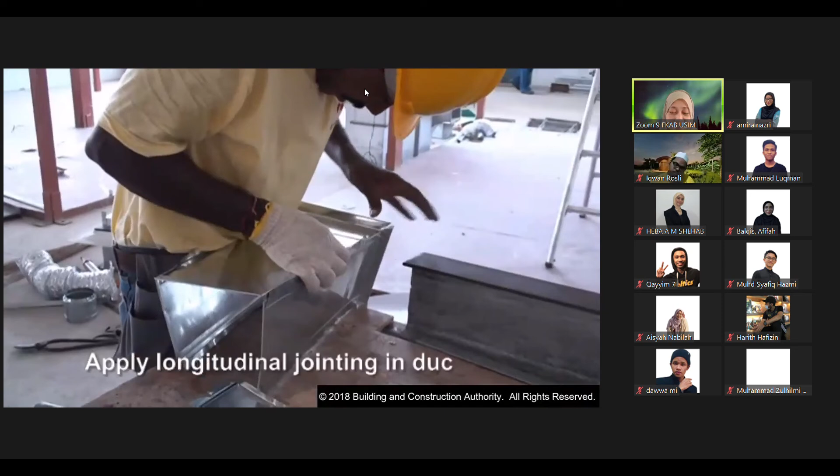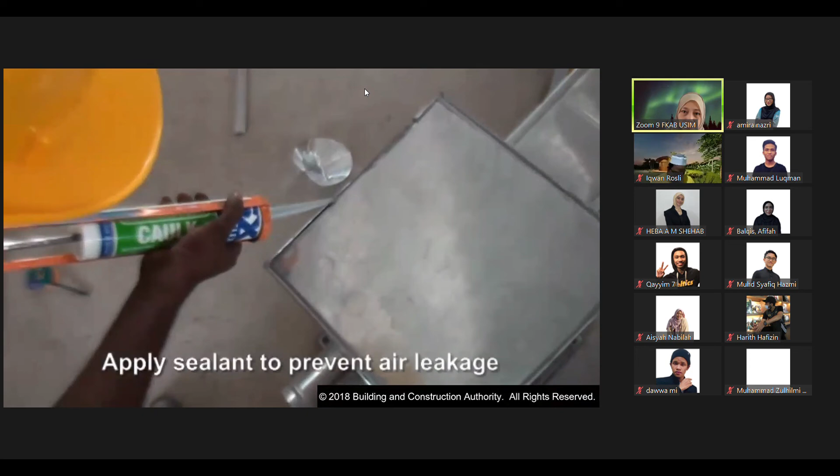Install, so fabricate. This is the flexible. This is a completed ducting. We have to measure. Okay. Very simple, macam senang je.

Alright, hope that everybody already understands. Stop share. Very simple. Okay, Akila, Kaim.

Yes, madam. Now you know I'm giving you the next exercise, to sketch kat mana sebenarnya. I'm giving you the section, so where is the location exactly for the system? I'm giving you sections sekejap lagi, so nanti you sketch sekejap dekat photo using annotate. I'll find you the section now.

Sebab kalau nanti tak faham, Alis, Amalin, dan Alis. Nur Alis Amalin. Alis. Yes, madam. Mana ni? Aduh. Oi, Alis. Yeah, so are you with me daripada awal? Yes, madam. Okay, I try to get you the section. Aisyah ada? Aisyah. Aisyah yes, dengan madam. Alia. Okay, Alia Farina. Yes, madam. Amira. Mira, Amira ada. Yes, madam. Anis Syabia ada. Ada madam. Okay, good. Nanti madam sambung lagi panggil, sebab sikit lagi ni dah nak habis. Lagi half an hour, nanti kita next week kita jumpa.

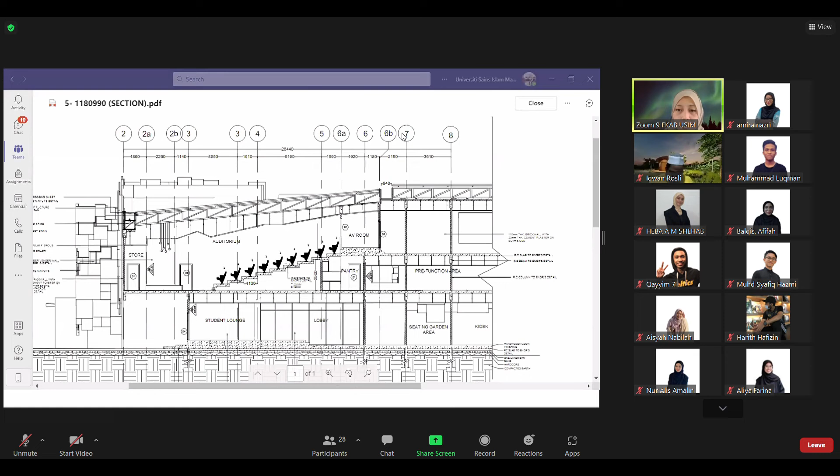Oh, ada section. Section, okay. Okay, tadi siapa yang I panggil nama dia tadi? Ada 2 orang tadi. Panggil seorang, takut dia ni. Okay, can you see that? This is a section actually. This is a section, so this is an auditorium.

So, okay, how you actually want to do the section to function for a building? Of course, this is if you consider this as a centralized system. Okay, students here are not so well captured, they tak faham, not so sure.

Ini siapa yang I panggil tadi nama dia? Akila, madam. Akila, okay. Akila, can you detect if this is going to be centralized, where actually is the position of the air conditioning that you need to draw at the section? You use annotate, tak apa, salah tak apa, kita nak belajar. So that you know, when you do the section, ducting madam, yeah, ducting dia kat mana?

Okay, why? Why I slow ni? Because I want everyone, I mean annotate, you sketch. Dah annotate dah nampak.

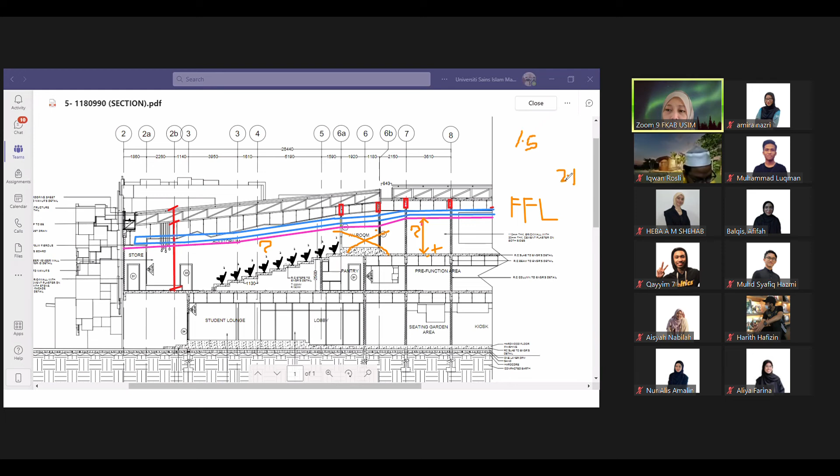Every room is not function because the height of the room is below 1.5 meter. The door has to be 2.1 meter for the door height. This is already wrong, still this is not the accurate section. This is not function at all because they don't take into consideration the height of the ceiling from the beam and also the ducting, because they declare this area is decentralized, but they are using centralized air conditioning system. Okay, so you know the wrongdoing from the sketches here.

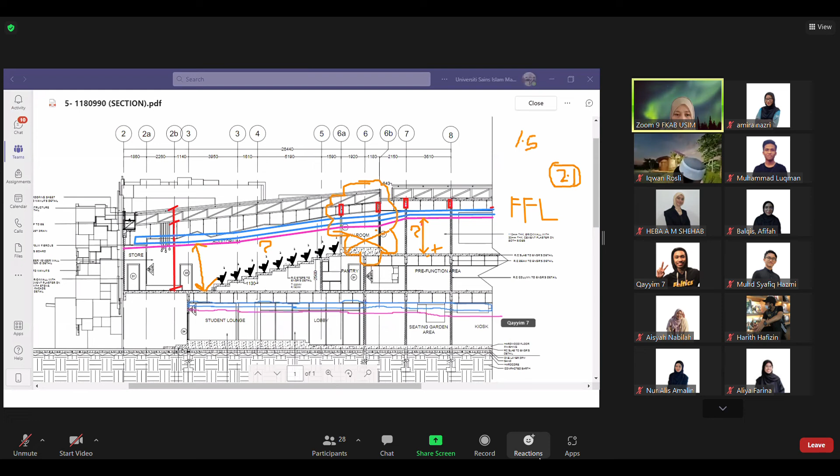Okay, thank you, this is right, betul. So normally, this is the floor slab, the upper floor slab. Yang ni adalah rod dia, steel rod. So biasanya beam, normally the beam size, let's say this is 450mm.

Okay, alamak, I use this one lah, I use this one. Ni 450 kan? 450mm, dia punya beam. Okay, then the aircon kat bawah dia.

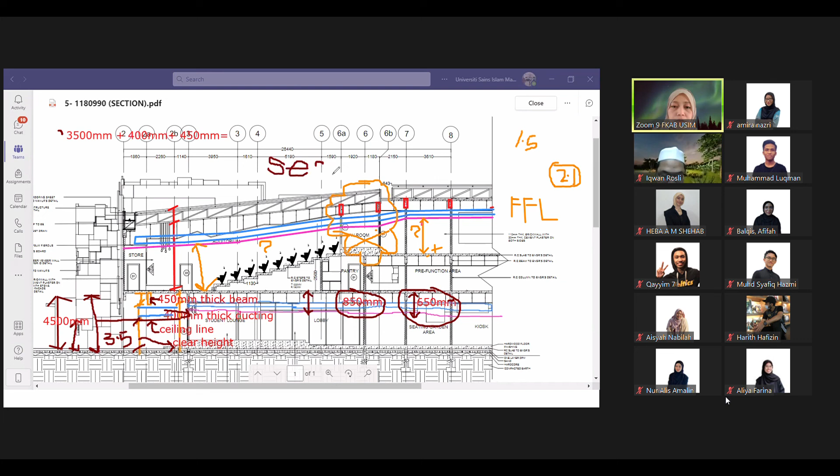This is what you must take into account when you are doing the section. Just want you to know, to understand the position and the consideration when you draw the section. Okay, that's it, finished about aircond. After this, if you still don't understand about the aircond, you still can ask next week. As for now, this is the part that you need to understand.

Haris, you must know how to draw. Qayyim, you must know how to draw. And the girls, you need to know what is the height of the section, you need to decide. For gallery, you can sketch already. Okay, need to have in your drawing consideration.